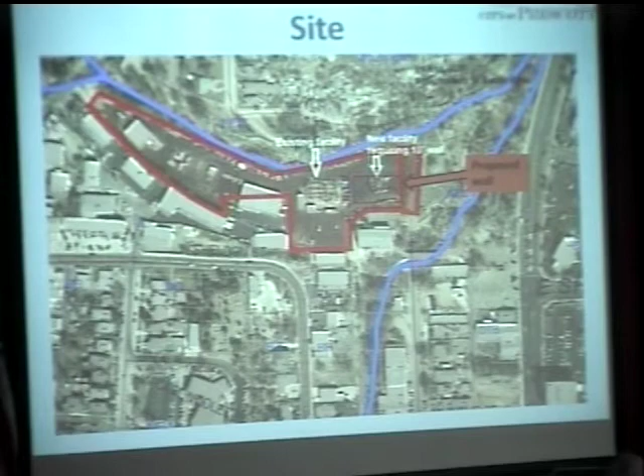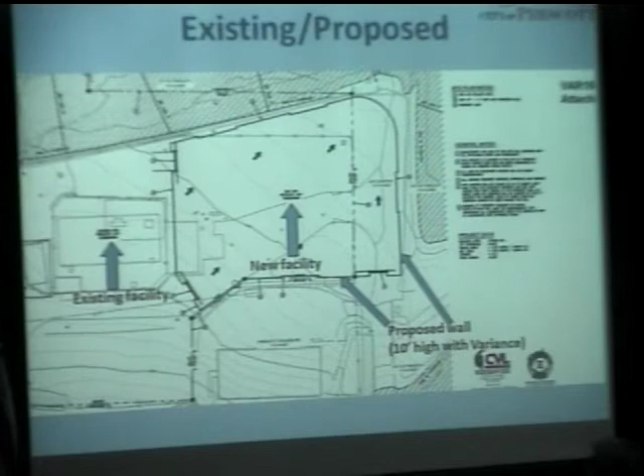Here is the site plan they provided. You can see the existing facility, the new facility, and the proposed wall, which on the west side would be between the existing facility and the new facility. It would extend north almost along the property line, and then over to the eastern property line. It goes up along the northern lot lines, down along the eastern NOS zone lot, along the east side, and then on the south side. They're proposing three gates: one on the south, one on the east, and one on the west. So the proposal today is for an increased wall height to 10 to 11 feet with the variance.

Regarding the variance criteria: for extraordinary conditions, there are no significant factors, though there is a different elevation, with the site at a lower grade than street level. For substantial detriment to health or safety, the proposed increased height is meant to improve safety and welfare, which is one of the criteria we look at, so there's no detrimental effect, only improved safety. As for surrounding lots, one other lot bordering it is industrial light, while the others are commercial and open space zones, some city-owned property to the north and east, so it's a different sort of use than surrounding lots. It is an existing and proposed use, and there is the public benefit of utilities. Regarding the general plan, the requested variance is in compliance with the general plan.

The IL zone and utility use has different safety and screening needs than surrounding uses and lots.

That's the basic information. I have renderings included in your application packet, so I can put those up if you'd like to see the wall. At this point it's pretty general. They're proposing a 10-foot block wall with some features at the top that would prevent climbing. I can answer questions, and the applicant is here too, so they can answer any other questions you have.

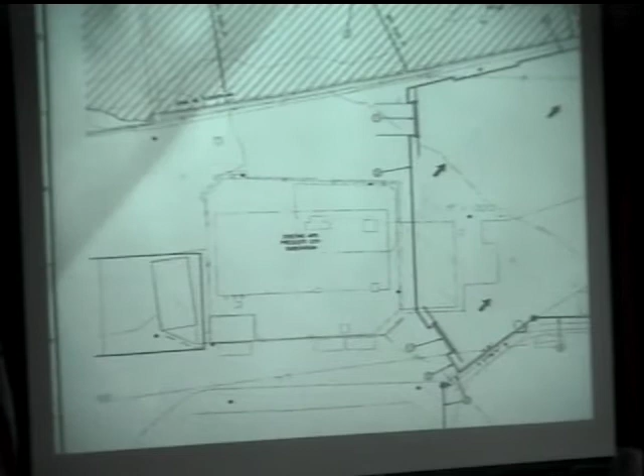The resident's correct, there is an existing 6-foot tall chain link fence with razor wire above that retaining wall. That fence would be removed as part of our project. We don't need a retaining wall, razor wire, and a masonry wall. We'd remove the existing chain link fence, which we believe will help beautify the area, as the new wall has better aesthetic appeal than razor wire and chain link fence.

That's what's occurring along the north side and the east side of the project. Has APS had any issues with the homeless or those who'd like to live next to and adjacent to your wall?

At this site, we haven't noticed any homeless population, but I imagine there may be folks that find that area fairly nice to camp in, illegally. That would be to the east and to the north of the project.

The substation will encumber the area that APS currently owns. What happens to the east of the new wall, within the other portions of the open space area, is really more of a police matter, I assume. So you're not affecting that particular portion where the homeless appear to be.

I don't have an exact location - if you'd show me on a map where the homeless are hanging out, we could let you know whether we're helping, but I think most of that's probably occurring to the east of the substation, outside the existing substation perimeter.

As you can see, there's quite a bit of open space that's not improved. The area that's improved today, inside the red box where the asphalt is, is the future area that would be surrounded by the wall. The natural area with the trail system to the east of our project, we do not own, and would not have any responsibility to help handle the homeless population living there.

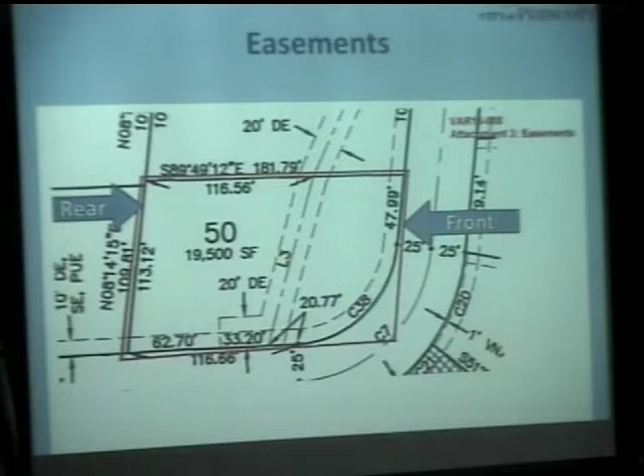So there's that 10-foot easement on the east and south, and a 20-foot easement on that eastern third to half portion of the site. And you can see on the west, on the left, the 25-foot setback that would be required.

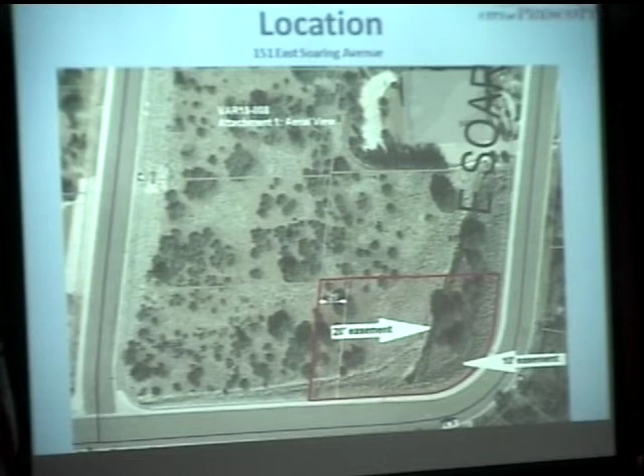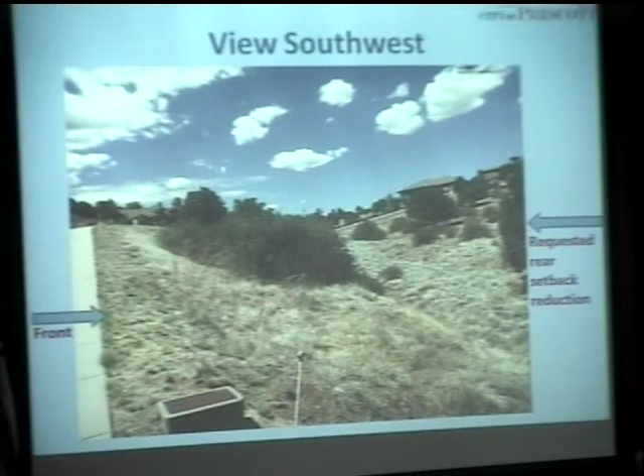This is a photo of the site, the view southwest with the front there on the left, and on the right, the requested rear setback reduction area that they are asking for.

And the variance criteria: it's a corner lot with that corner setback, multiple easements, the one through the center, and then along the south and east. The rear setback would still allow adequate emergency access, so that's not a concern.

Special privileges: they've got the lot easements and setback, limited buildable pad area. Other lots have similar slope and easement features.

It's in compliance with the general plan, and their subdivision, similar to the last case we had like this, has a minimum house size of 2,500 square feet. So what they're proposing is a 2,794 square foot house in compliance with their subdivision, so it would be in character with the neighborhood.

And I can answer any questions. Do we have any questions for staff? I have one, please.

The rear yard area, I assume that's going to be excavated, since it's on a hill? I'm assuming they would need to, I'm not sure what their plans are yet. We haven't received plans for this one. I'm assuming they would probably need to do some grading because of that slope.

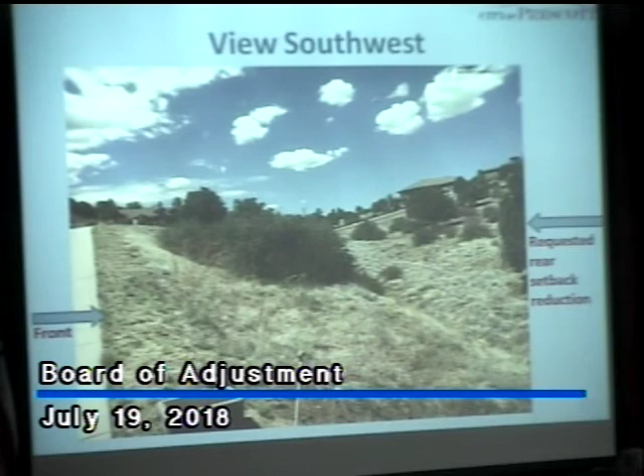I'd like to make a comment about homeowners that have items like this in their property, easements. They can't adjust the easement. Once the easement is there, you can't decide you're going to block it up to divert water to another neighbor. You just can't do that.

So basically, when an applicant comes in and says he has an issue with his site plan, and he's got to put his house somewhere on there, we normally give him relief, because it's just a natural way of doing things. And it's important for us to understand that. It's not his fault that the easement is through there. It's a way to divert some of the water, so he can't adjust it. So in most cases, we would give that particular variance.

Right, this is the kind of case that variances were created for. Yeah, but it's very important to understand that. We can't have the guy just plow over that easement. You can't do it.

Okay, so are there any, is the applicant here this morning? Yes sir, come on up. Please state your name and address for the record.

Tom Terry, Distinctive Homes. I was the architect on this. My address is P.O. Box 3988, Prescott, Arizona.

To answer your questions on what we would like to do on the pad, we're planning on building up the house to create a level pad up a little higher near the back of the property. So I think Katie represented us well, and it's just a little tight. We just need a little relief on that back setback if we could.